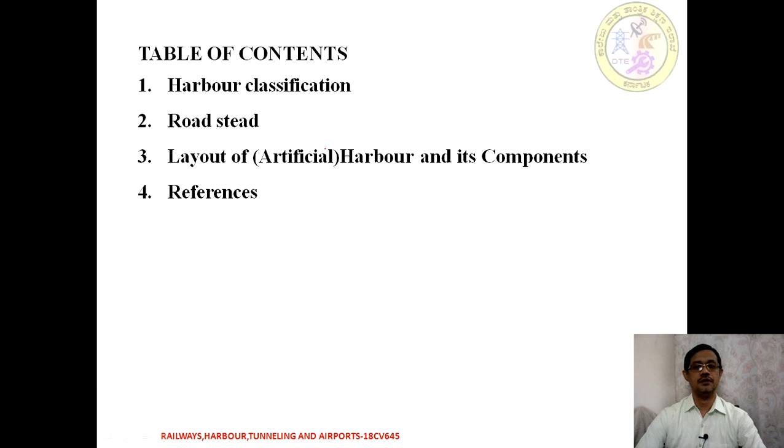In this session we are going to discuss harbour classification, road steads and layout of an artificial harbour and its components, and lastly the references.

Harbours are classified into primary and subsidiary. Primary classifications include the natural harbour, protected harbour, or artificial harbour. In the subsidiary classification of a harbour we have road stead, harbour of refuge, naval harbour, commercial harbour, and lastly fishing harbour.

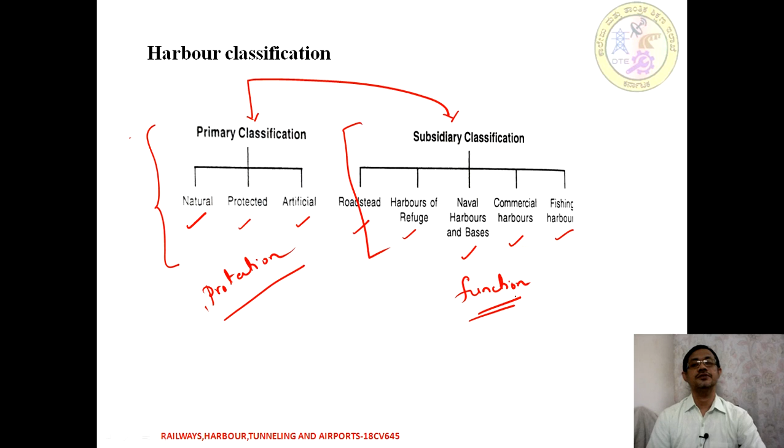This is based on the functional parameter, and this is based on the protection we are having. For example, this is with respect to the type of protection we are having, so it may be natural or it may be artificial. This is how we are classifying the harbour with respect to primary or subsidiary, depending on the functionality.

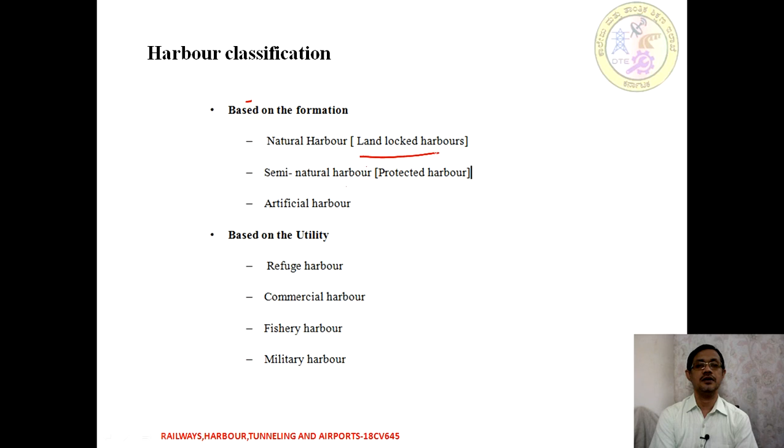Moving on to the first type of classification based on the formation: we have a natural harbour, meaning the land itself is locked with respect to the harbour. Semi-natural means sometimes it's called a protected harbour, and lastly man-made harbour, which is called an artificial type.

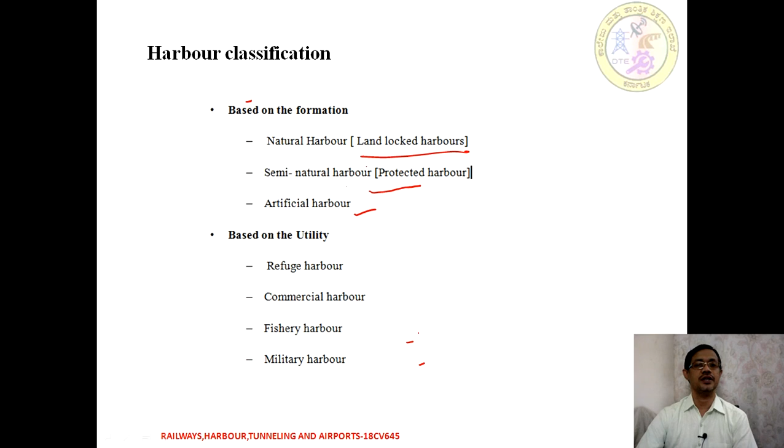Next we classify based on utilities, like refuge, military, commercial, or fishery, depending upon how we are utilizing the harbour. Based on that also we are going to be classifying the harbour.

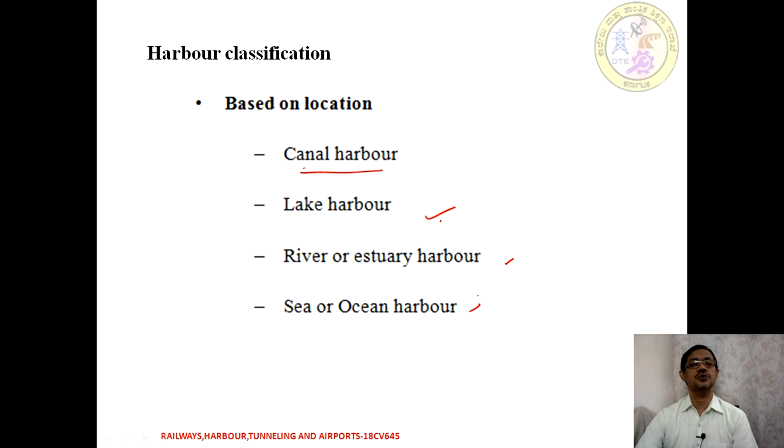Apart from that, depending upon the type of location where the harbour is functional, suppose if you are using a canal as a structure, that is going to be a canal harbour. Depending upon the lake, estuaries, sea, or ocean, we are also going to be classifying the harbour based on the location.

Moving on to harbour classification: the landlocked or natural harbour is a natural formation of a sea coast for the safe discharge of facilities with respect to the ship, or seashores having a creek, basin, or inlet. It is protected from storms and waves by the natural configuration of land. Such a harbour is called a natural harbour or landlocked harbour.

As the name indicates, the land itself is locked in such a way that it provides a protected network for ship operations.

Similarly, natural harbours are formed entirely by an inlet from the sea. They might also be constituted by headlands or projected parts of the coast converging towards each other. They may also have narrow entrances which lead to a sheltered area of water. Natural harbours do not require any protective or formative works.

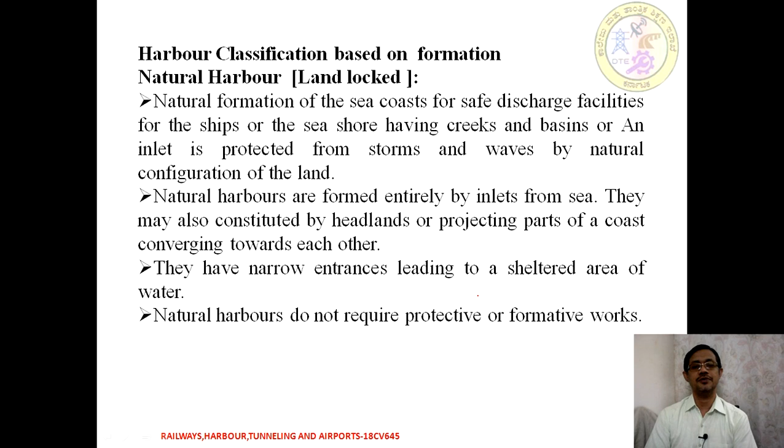A few examples of this might be New York, London, or Liverpool. These are going to be having what we call a natural harbour type, that is, the land is totally protected by itself with no man-made constructions. Apart from that, Sydney, Melbourne, and Baltimore are also examples. If we consider the Indian perspective, Mumbai and Kandla are natural harbours.

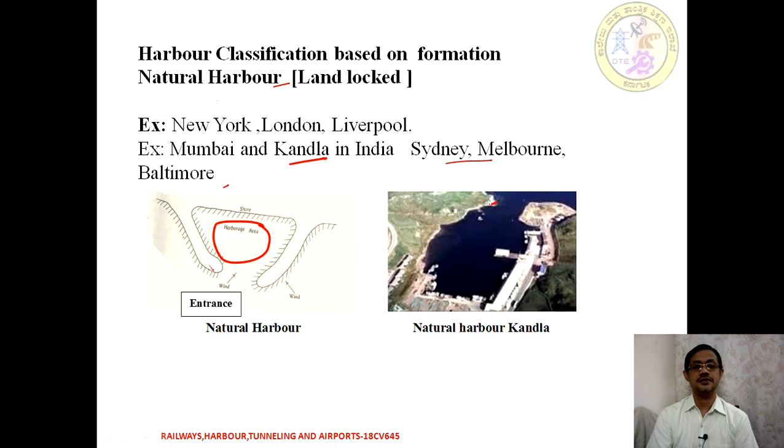So these shores are natural structures; there is no man-made construction apart from a few important components like quay or berth. This entire area is naturally protected, that is the harbour area for ease of operation. This is an entrance, a shorter or narrowed entrance which has been protected naturally. Such a type of harbour is called a natural harbour.

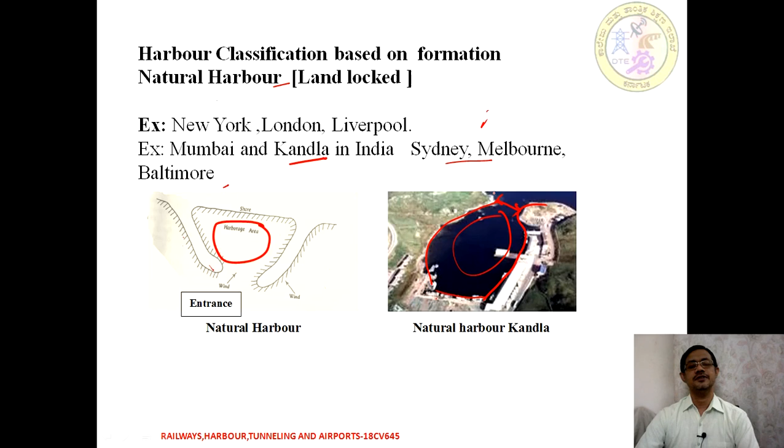This means it is naturally formed, so no construction activities are required apart from a few important components.

Next is the protected type of harbor, sometimes called a semi-natural harbor system. This harbor is protected on only one side by the headland, and it requires man-made protection as it is constructed. Protected harbors are partly natural and partly artificial, lying in between. They are formed primarily in bays or such positions along a coastal line. Artificial construction of a breakwater is necessary, or sometimes entrance moles may supplement the existing natural features.

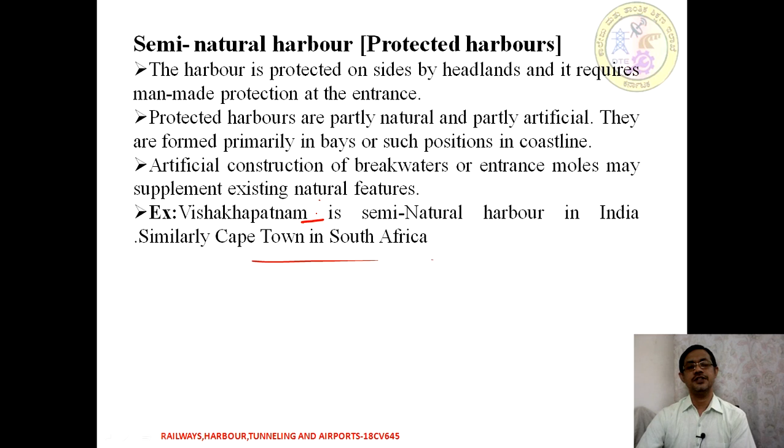As far as world examples are concerned, Cape Town in South Africa has one side natural and another side a man-made structure. In India, Vishakhapatnam is an example where we have a semi-natural type of harbor.

On one side it is totally protected from nature itself, having a shore protected from external agencies like wind. On the other side, a man-made construction according to engineering design has been done - that is called a breakwater, which covers the harborage area with respect to a narrowed entrance.

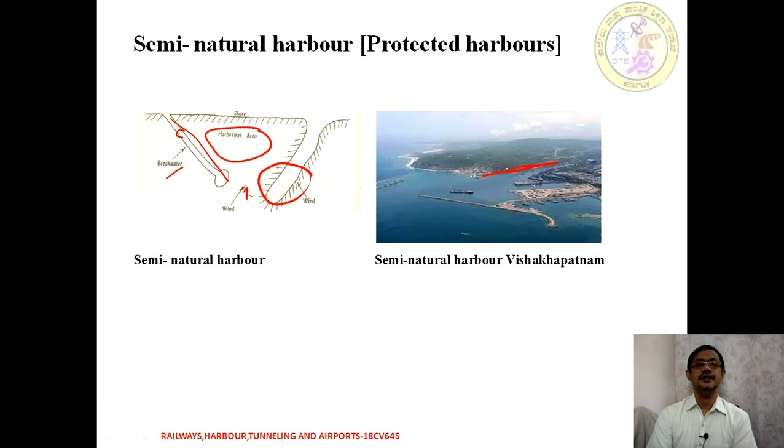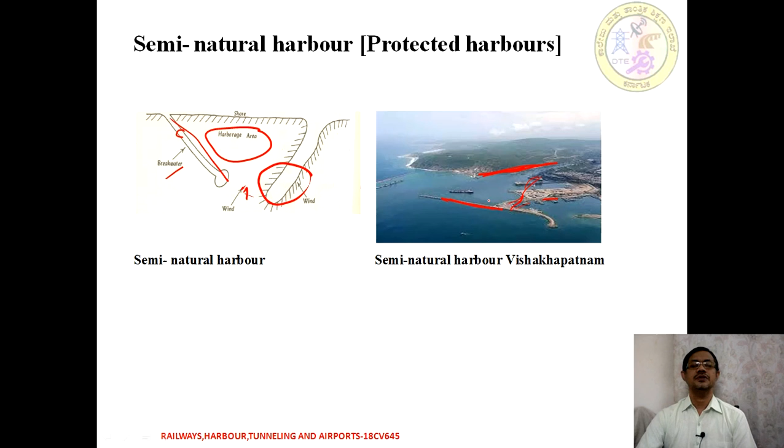In this image we can see that on one side we have a natural shore protected from the wind, and on the other side we have a man-made structure. So this is a combination of artificial and natural - this type of harbor is called a protected harbor.

Next is the artificial harbor. This is man-made, requiring all the engineering skills and methods to construct according to requirement - that type of harbor is called artificial. It means there are no natural shores present. According to our design principles, if we construct walls on both sides, those are breakwaters, and such structures are called artificial harbors.

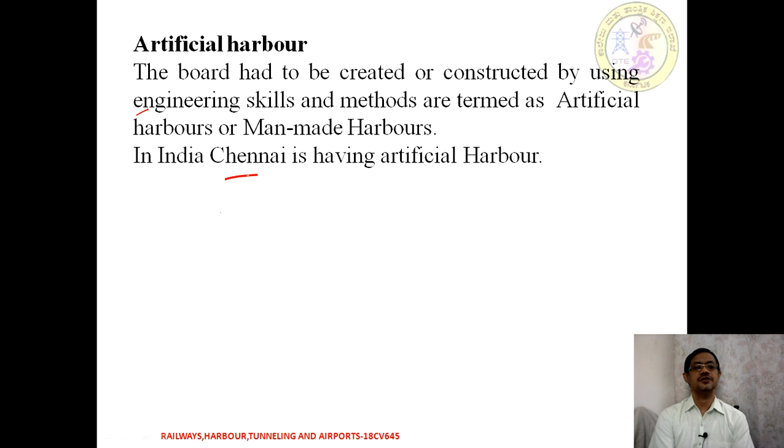In India, Chennai is the example of an artificial harbor. In the figure, this side has no hatched mark, meaning this side is also a breakwater, constructed according to our engineering design.

On the other shore also we constructed a breakwater, and all other things provide the entrance or harborage coverage. Such structures are nomenclated as artificial harbors. On the right side we can see this harbor which has been constructed - man-made, one side a breakwater, and another breakwater on the other side, with the entrance provided. This is an example of Chennai harbor - an artificial harbor.

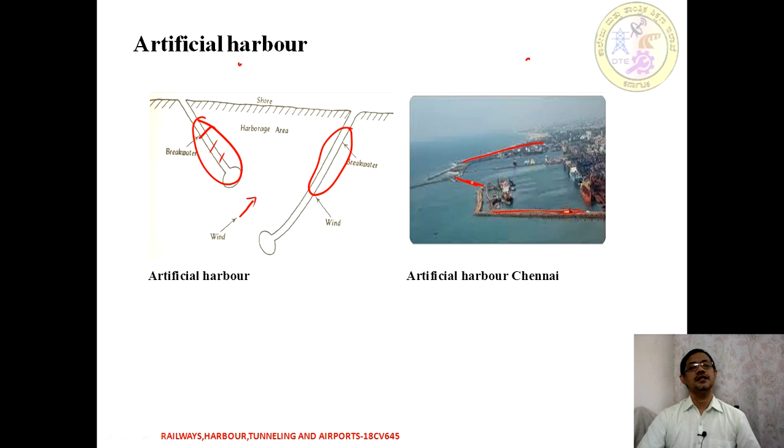So try to remember that depending upon natural means, shores are natural. If you construct on one side it becomes semi-natural, and if construction is done on both sides according to design, that becomes an artificial harbor.

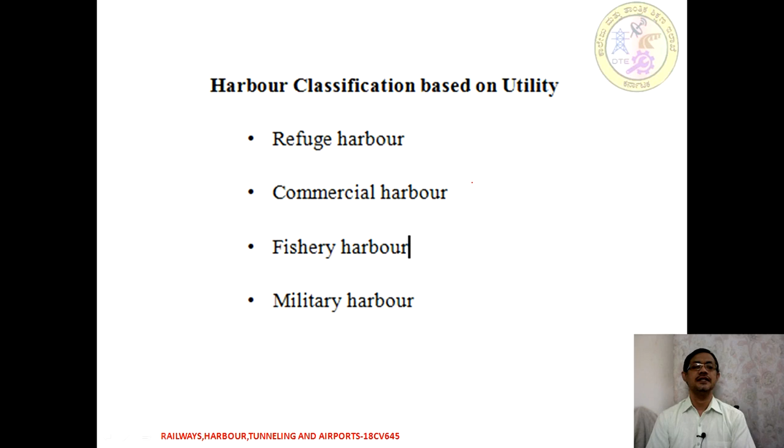Next is the classification based on utility, as we read in the previous slide - refuge harbor, commercial harbor, fishery harbor, or military harbor. What exactly is a commercial harbor? In which docks are provided with all necessary facilities for loading and unloading of cargo, and dry docks are provided for ship repairing - that type of harbor is called a commercial harbor.

Commercial harbor includes only cargo facility. Hence requirements are: spacious accommodation for mercantile marines, ample quay spacing has to be required. Apart from that, facilities for transporting, and sheltered area for loading and unloading has to be required. As it involves cargo, it requires storage sheds for the cargo systems.

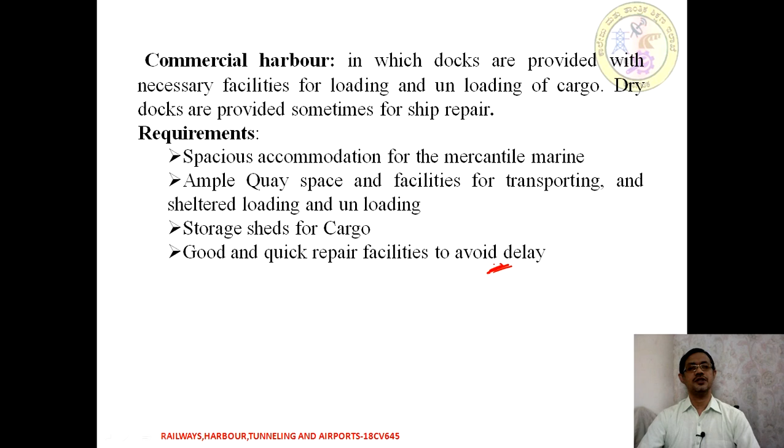Apart from that, good and quick repair facilities are needed to avoid delay - that is why dry docks are required. So that is the perspective of commercial harbor, in which docks are a necessity. As I said, space accommodation is needed and delay is to be avoided - the same thing has been explained.

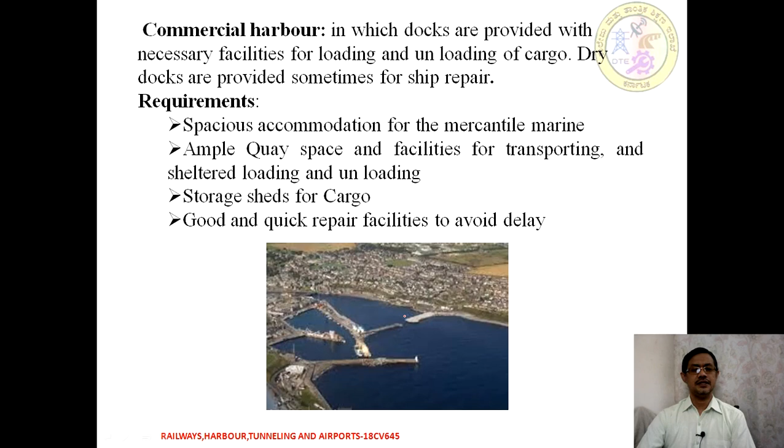The next type is fisheries, as the name itself indicates it is meant only for fishing operation. The requirement for this type of harbor is that it should be constantly open for both departure and arrival of fishing ships, so there should not be any entry gate or locking system. Loading and unloading facility should be quick, and it should dispatch the facility for perishables through other modes of transport like rail or road network.

As the fish is perishable, it requires quick and immediate transport. Apart from that, for storage it requires some refrigeration facilities, and also storing space is required for preserving the fish that is being caught according to requirement.

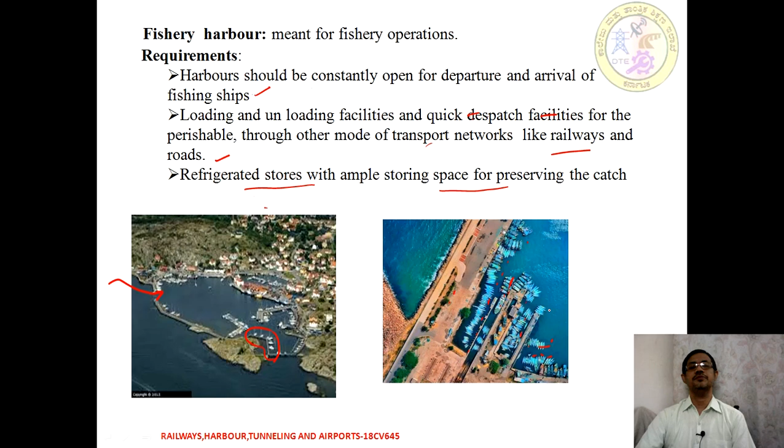Depending upon loading and unloading facilities, other components of the harbor are provided. It is only dedicated so that no other cargoes are operated, only fishery boats or some vessels can be operated. Such a harbor is called a fishery harbor, because its primary function is for fishery operations.

Next is the military harbor. It is meant from the strategic operations point of view, specially designed with natural disaster or war taken into account. It is always called a naval base, and for this purpose we have naval vessels. It serves as a depot.

In India we have one in Mumbai and also Cochin. Apart from that, we have Sea Bird in Karnataka. These are all with a strategic point of view, concerning the safety or defense of a country.

From that, it requires a harbor to have good enough space for storage and repair facility. It means it should have both dry and wet docks; this is necessary. Apart from that, we should have all the proper navigational aids, like light buoys or whatever is concerned for proper operation.

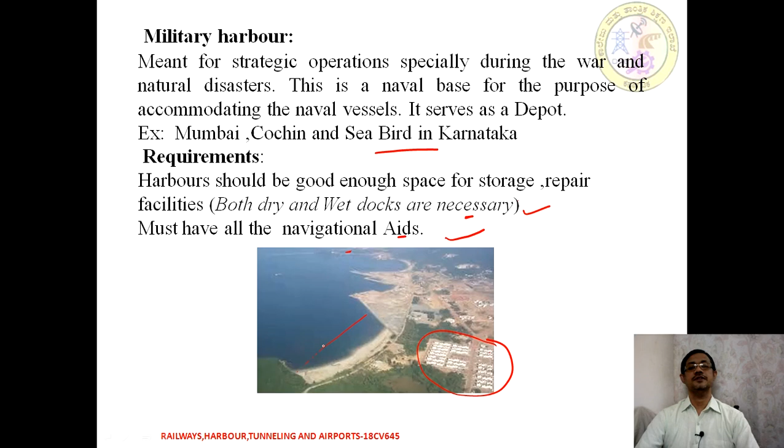So those are all with respect to the utility. Apart from that, depending upon locations, we classify the harbor as a canal, lake, river, or sea shore or ocean type.

Moving on to the first category, that is the canal harbor. As we know, if the harbor is located along the canal for sea navigation with respect to inland, it is found that maintenance dredging of the canal basin is generally negligible because of constant flow of water.

Next type is the lake type. This type of harbor is constructed along the shores of a lake. If the lake is larger, then the conditions are similar to those of the oceans or sea, except that tidal action does not occur in the form of a lake, which is a smaller area.

Next is the river or estuary type of harbor. These types of harbors are constructed along the banks of rivers or estuaries. The harbors are constructed on the tidal part of a river or the lower basins of the river.

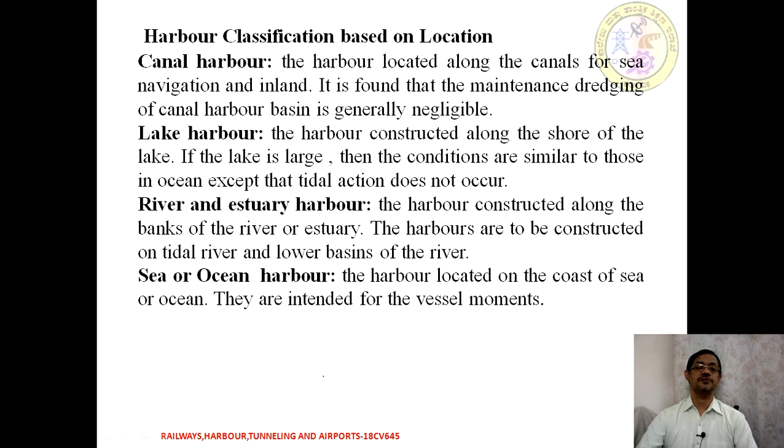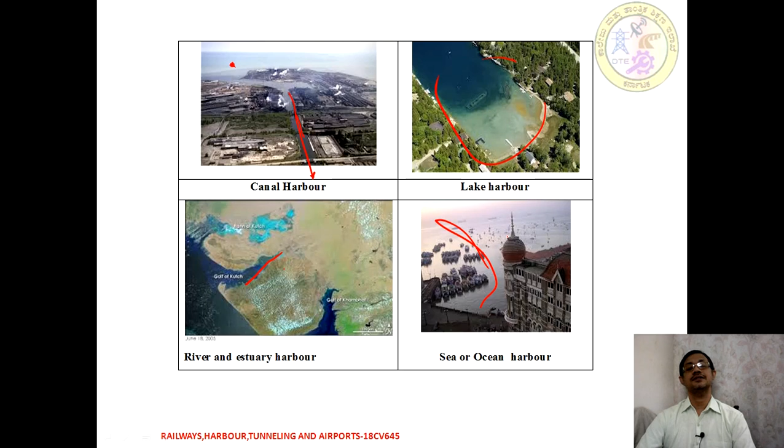Apart from that, when the entire sea is opened for harbor activity, those are called sea or ocean type harbors. This is with respect to the primary functions.

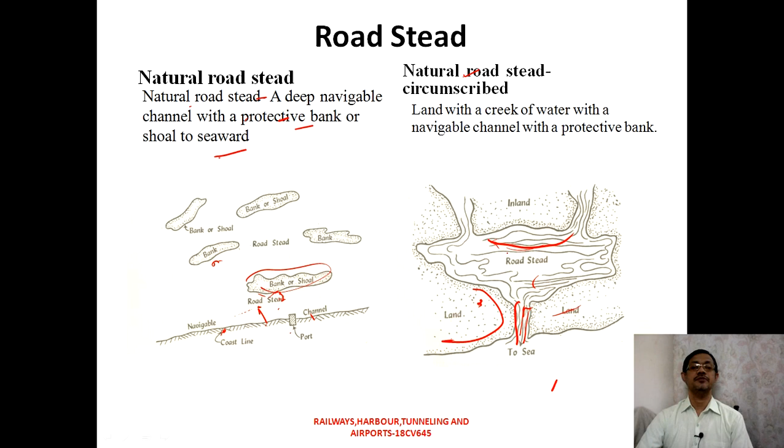Next type is the natural roadstead with circumscribe, in which land with a creek of water with a navigable channel having a protective bank is called natural roadstead circumscribe. In this image we have a land, and a small portion of land has an entry of seawater, forming inland water for continuous operation. Such type is called circumscribe - it means the roadstead is circumscribed from the land and water.

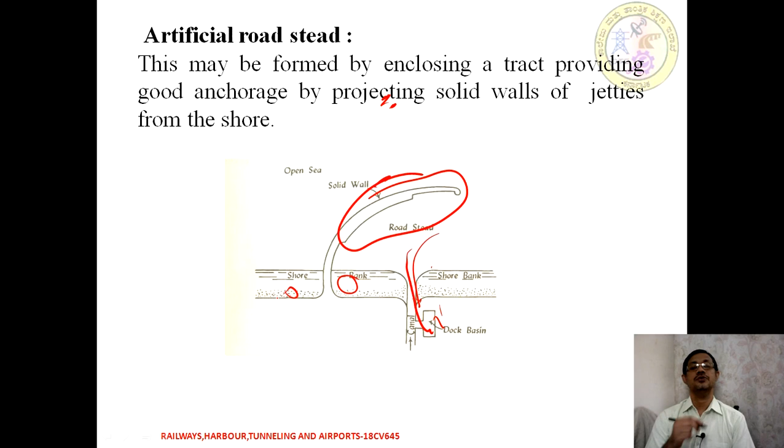Next type is the artificial roadstead. This may be formed by enclosing the tract, providing good anchorage by projecting solid walls of jetties from the shore. If you have an open sea with a solid wall, this portion becomes a roadstead when we have a dock basin, with shores and banks on the other side. Such type is called an artificial roadstead.

Next type is the artificial one, with two classifications: artificial roadstead confined, and artificial roadstead circumscribed. Same as explained with the roadstead concept, but this is the artificial one.

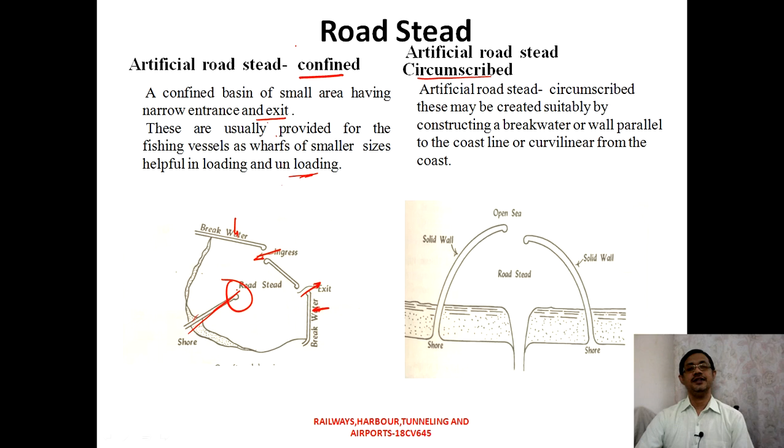Next is artificial roadstead circumscribed. These are created by suitably constructing a breakwater or wall which is parallel or sometimes curvilinear to protect the coast from uncertain activity - such types are called artificial roadstead circumscribed. This activity is nothing but natural protection with respect to wind or waves. This is how we construct with respect to roadstead.

Moving on to the next topic: the layout of artificial harbor and its components. This is important from the examinations point of view. We have both land side and seaside activity. As far as artificial harbor is concerned, it means a man-made harbor, so we need to construct breakwaters on both sides.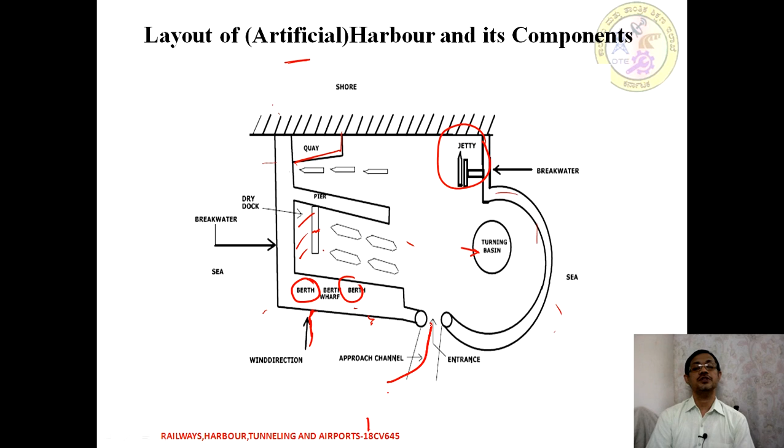Moving on to this sketch, we are going to be having different components like a quay, jetties, then it is called a breakwater. On the other side we are having sea water. This portion is going to be called a dry dock. Then we are going to be having berthing, so berthing wharfs or berths. Apart from that, we are going to be having a turning basin for turning the position of a ship for directional movement towards the entry gate. Next we are going to be having wind directions or wind protections. Approach channel for the approach of ship from the sea towards the harbor. Then this portion is called an entrance, sometimes provided with an entrance gate. So these are the layout components of a harbor.

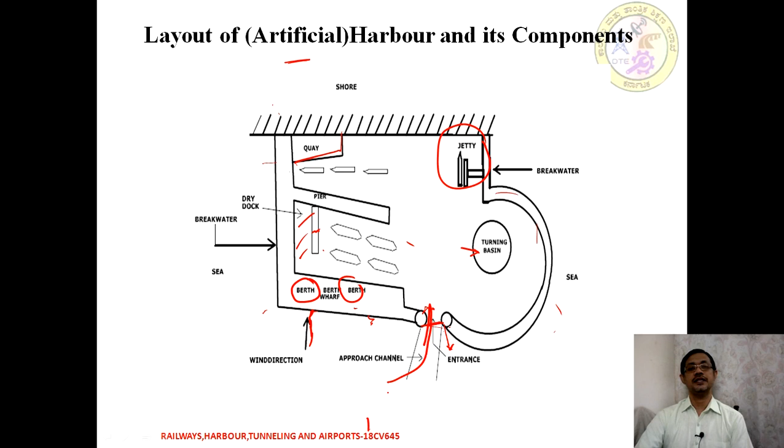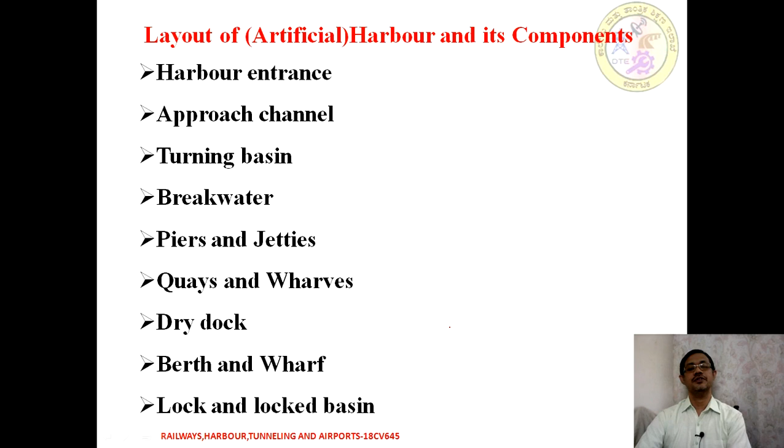So that is what we have been discussing. Apart from that, we are going to be having a harbor entrance, approach channel, turning basin, breakwater, piers and jetties, quays and wharves, dry dock, berth and wharves, lock and locked basin. These are a few of the components we are going to be discussing.

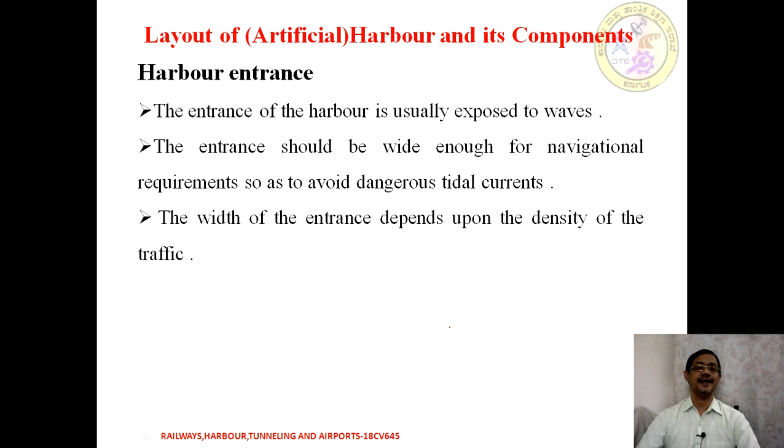First one is going to be the harbor entrance. The harbor entrance is usually exposed to waves, hence it needs to have a wide enough space, or the entrance has to be provided for navigational requirements so as to avoid dangerous tidal currents. The width of the entrance depends upon the density of traffic it handles. That is with respect to harbor entrance.

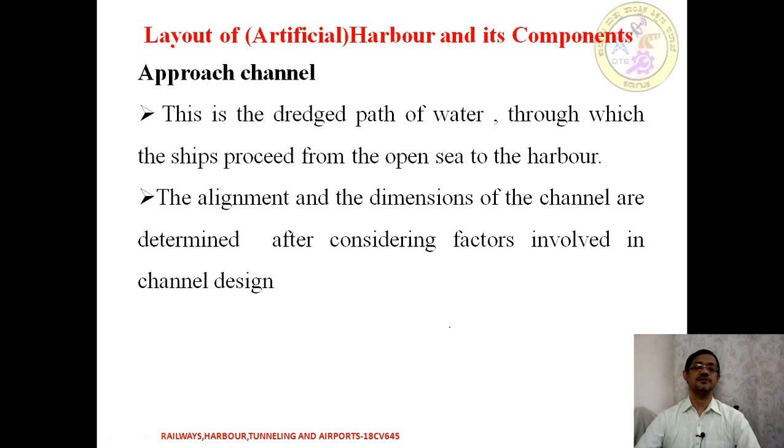Next is the approach channel. This is a dredged path of water through which ships proceed from the open sea to the harbor. That is called the approach channel. The alignment and dimension of the channels are determined after considering the factors involved with respect to channel design.

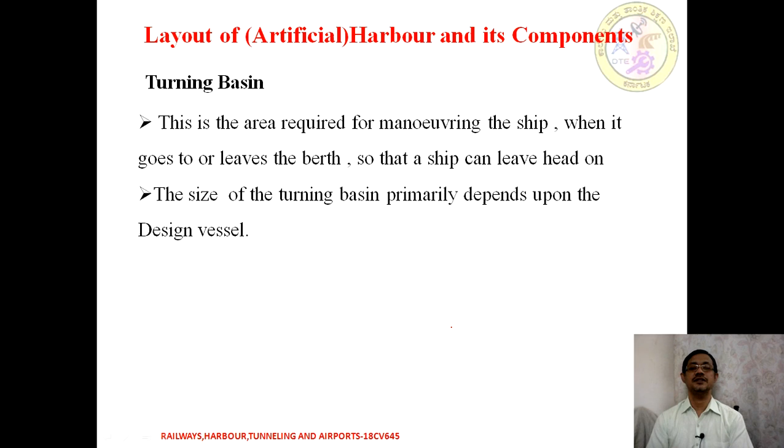Next is the turning basin, an area required for maneuvering of a ship when it leaves a berth, so that the ship can leave head-on. The size of the turning basin primarily depends upon the designed vessel or ship.

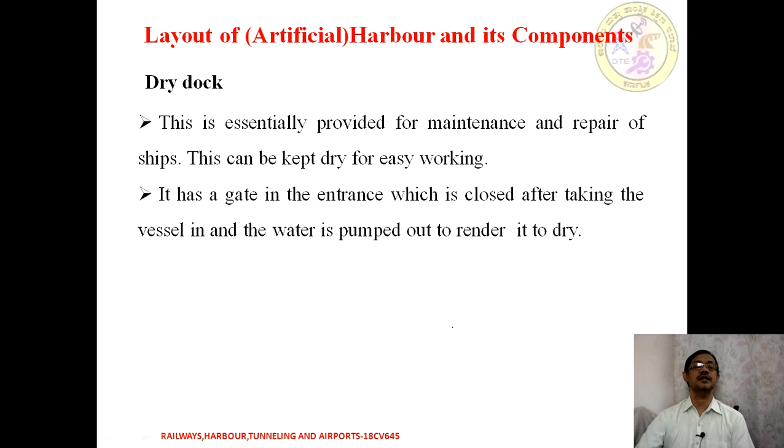Next is the dry dock. This is essentially provided for maintenance and repairing of a ship, so it can be kept dry for ease of repairing. It has a gate for the entrance which is closed after taking the vessel inside, so that the water is pumped out to render it dry for repair operations. That is called a dry dock.

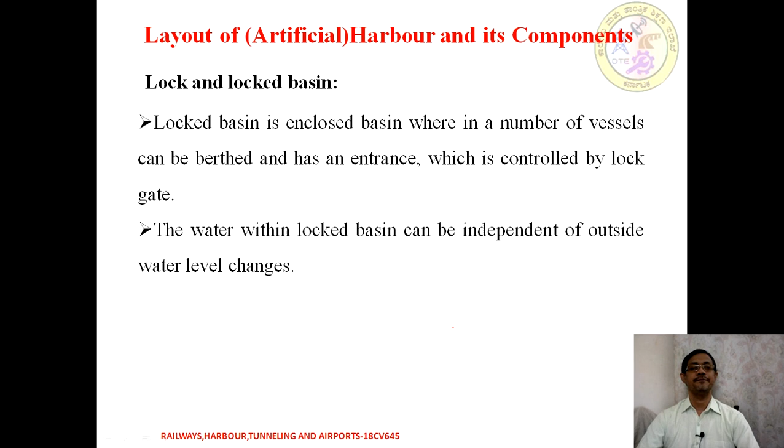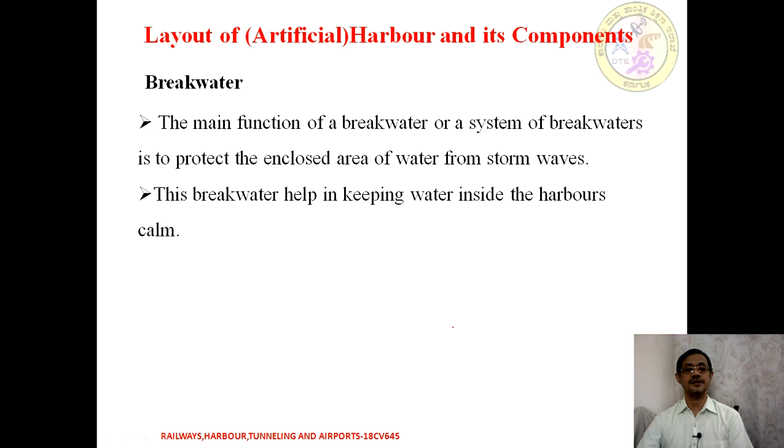Next is the breakwater. The main function of a breakwater system is to protect or enclose an area of water from external agencies like storm waves. This breakwater helps in keeping the water inside the harbor calm, meaning a leveled surface. As the name indicates, it is a breakwater, meaning the water or wave intensity is broken to make the water calm.

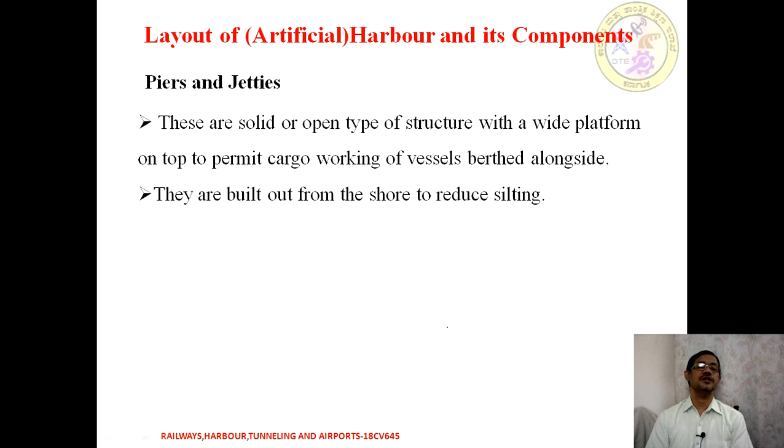Moving on to the next component, piers and jetties. These are solid or open type structures with a wide platform on top, which permits the cargo working from vessels berthed alongside. They are built out from the shores to reduce silting. Such types are called piers and jetties.

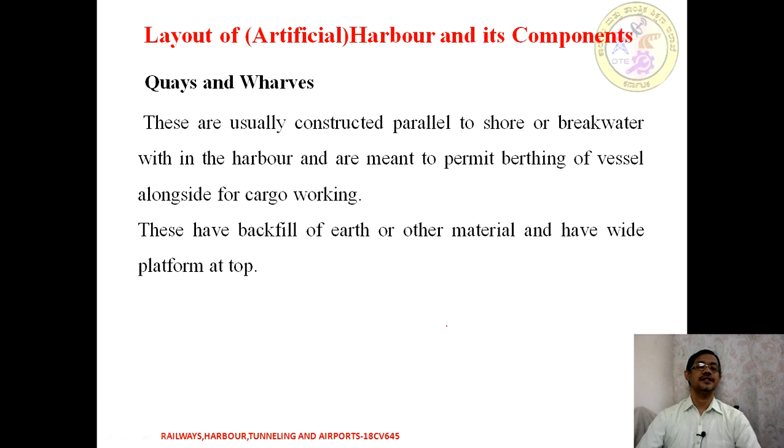Next is quays and wharves. These are usually constructed parallel to the shores or a breakwater within the harbor, and are meant for permitting the berthing of a vessel alongside for cargo working. These have a backfill of earth material used to create a wider platform on top. Such facilities are called quays and wharves. So these are a few of the components we have been discussing with respect to the layout components of a harbor.